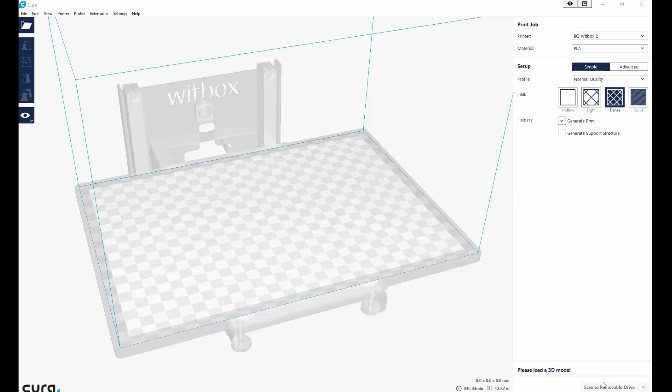In this video, we'll be looking at how to set up our print in our software to actually slice it and render it and get it ready for printing. So first thing we do, we put an SD card in our computer and we need to actually open our file. So we choose a file that we're wanting to print out. Here's something very basic, a little hook, and that will be brought up there.

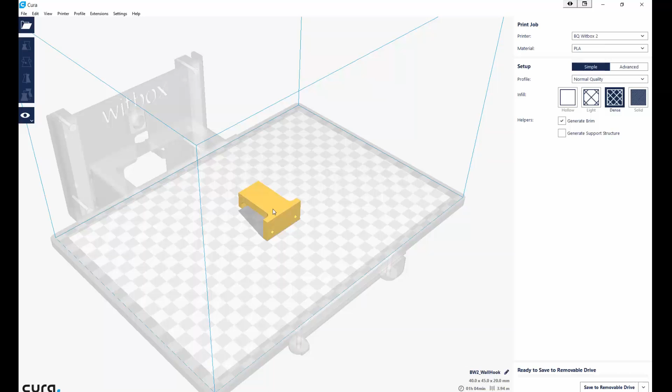Now, if it's on a slower computer or if it's a very, very complex part with lots of facets, it may take a little while to load, and so you'll just need to wait for it. Now, if we right click with our mouse and hold that down, we can then drag around and actually look at the part from multiple different directions. That can be useful for working out where the overhanging parts are and what it actually looks like.

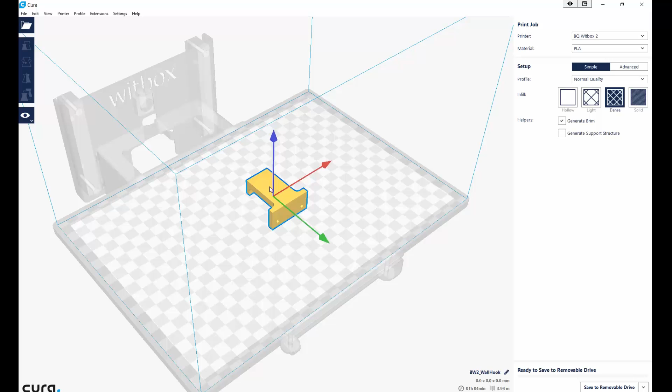Then we can click on the part with the left mouse button, and we have a few options there. We can scale it, so we can make it larger or smaller. Typically we avoid doing this because we actually want to do that in software and actually design that properly. If we click and hold the left mouse button, we can drag the part around. Typically near the center of the printer bed is a good place to have it though.

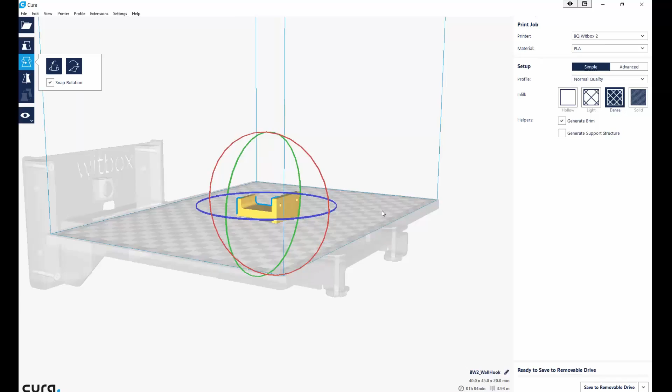The other part that we use a fair bit is rotation. And we click on rotation and click on one of these green ellipses there, which allow us to rotate it around in a particular direction. Typically, we'll want to put the largest face of the part on the printer bed and have that largest face minimizing the amount of overhanging area.

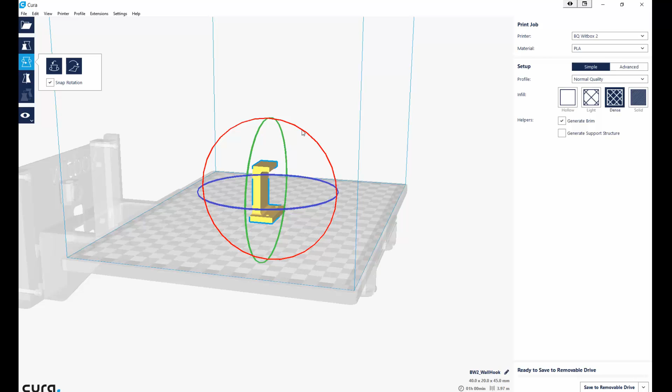In particular, if this part was like this, we'd have a significant amount of overhanging area here and need a whole lot of support structure here to maintain that overhanging area. If we put it flat on the bed like that, we don't have that overhanging area anymore, and so we don't require the support structure anymore.

Now we've got a few different infill options, and these allow us to choose how strong we want our print to be. So we can select hollow, which will print quite quickly, but it won't be very strong and there'll be nothing inside. Essentially, it will just be the outer shell. We can do light, and light will be a very fine hash that will provide a bit of strength there, but not all that much.

Then we can select dense, and you'll notice that our time taken goes up from 56 minutes to an hour and 3 minutes. So our crosshatch inside our 3D print will be significantly smaller, and hence it will make the parts stronger. I typically leave it at light if I'm printing a non-structural part, or dense if I'm printing a structural part that I need to have a bit more strength.

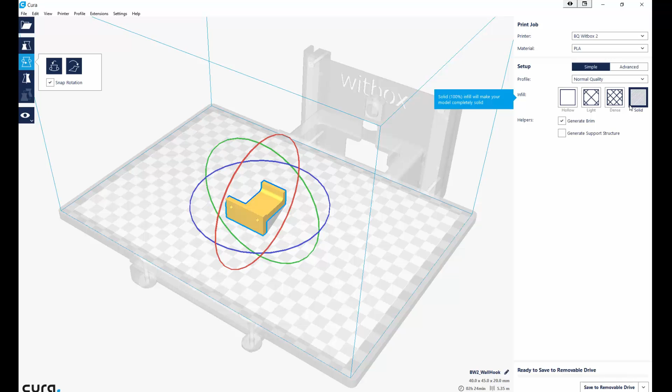I've tested these before in our universal test machine downstairs, and with a small part this sort of size, you'll be able to support 100 kilos of compressive force on it, compressing down the layers here. And our final one is solid, which will take significantly longer but print it as a completely solid part.

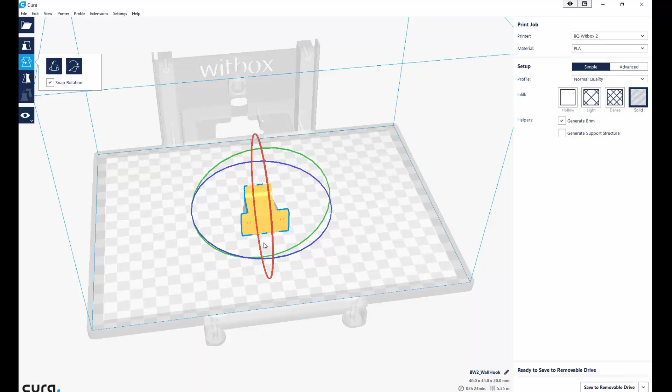Now, one thing to remember with 3D printing is they're fairly strong when you're looking at compressive force, so compressing up this way, and fairly strong thinking about pulling it apart in this way or in this direction. But the weakest part of the 3D print of all is when we try and shear it, so a shear force across the layers, or pulling apart in this direction, which pulls apart some layers. That's the part where it's the weakest, and so if we've got a particular part that we're thinking about and trying to make it strong, we probably want to have that force lined up.

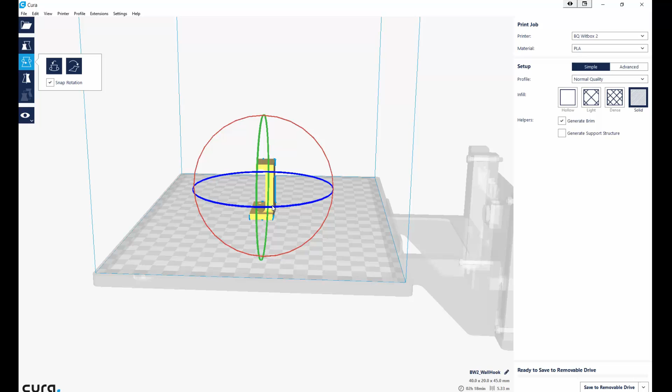So in this case, it's a hook. We have two holes there where we attach it to a wall. If we printed it up this way, the weakest part of this print is essentially in between the layers, which are built up layer by layer. This would be a bad way to print it besides the overhang, because if we put something on there, the shear force on this part here would be rather large.

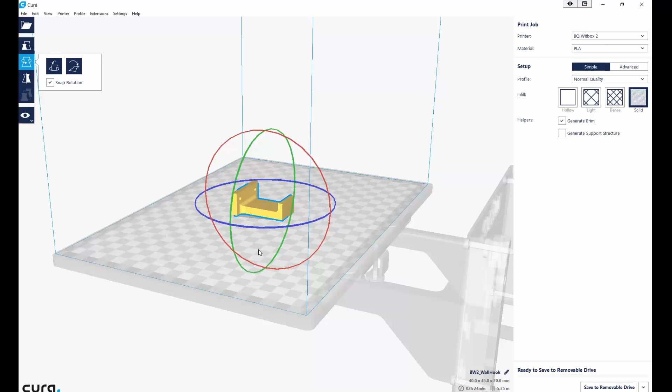Whereas if we printed it this way, these layers are built up one by one. So essentially we've got something of a solid piece that flows all the way through there into this bracket part that attaches to the wall. Sure, this part here could break off. We could put an extra screw at the bottom to provide it with a bit more support. But this is the best way to print it in this case.

Now, once we've done that, we can then select whether we want to generate a brim. A brim is basically a 1 centimeter border around the outside of the print that helps it adhere to the bed. Generally, I generate the brim. It takes a little bit extra time, but it minimizes the amount of warping you get where part of the edge of the print will lift up from the bed.

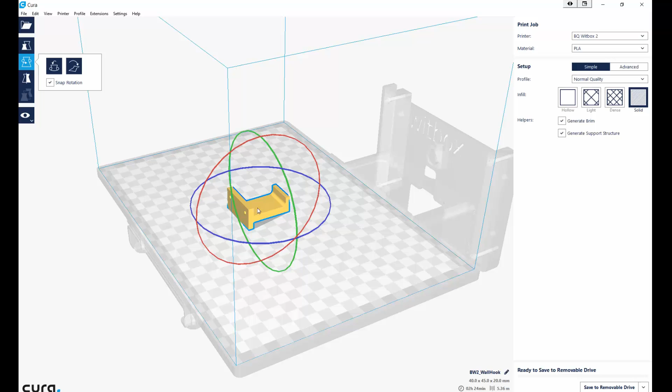The other option is generate support structure. And if we have an overhanging part, we may have some support structure that we require to do the overhanging here. So here we see it takes 2 hours and 31 minutes in solid mode with the support structure on. We'll take it off and we'll see it will drop to 2 hours and 18 minutes because the area here doesn't require to be supported anymore. Now at the end, the support structure basically snaps away, or we use a little knife to cut that support structure away.

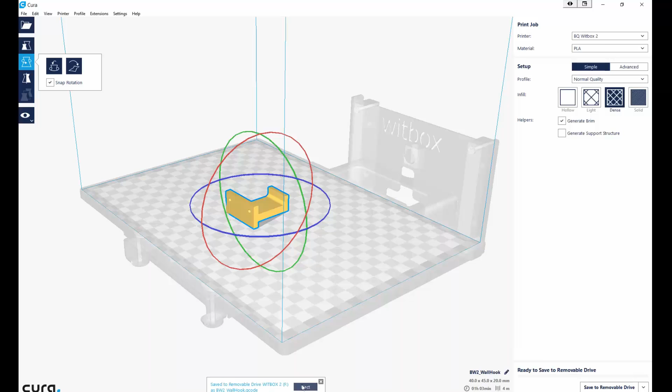So once we've specified what we want, so dense, generate brim, in this case no support structure, we put our SD card in and we can say save to removable drive. It'll export it to that removable drive. It says it's saved there. That might take a little while if it's a very big file. And then we can eject it and take it out and put it in our printer and start our print, which is what you'll see in the next video.